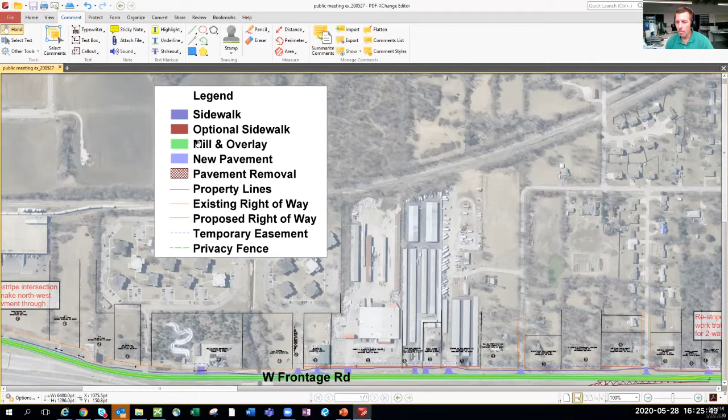So we're calling those optional sidewalk areas. The green is mill and overlay - that's where they come in and scrape off the top couple inches of asphalt and put down a new layer. The lighter blue color is anywhere we have new pavement, so anywhere the roadway follows a new alignment, that's where you'd see the new pavement. The cross-hatched area is where we have pavement removal.

Black are existing property lines. Orange is the existing right-of-way line, on the front edge of the properties as they abut - right now it's MoDOT owned, but that'll change over to city owned after this project. The proposed right-of-way is the red color. Temporary easements are a dashed blue, and there are a couple places where we've indicated privacy fence on the project, and I'll point those out as we go.

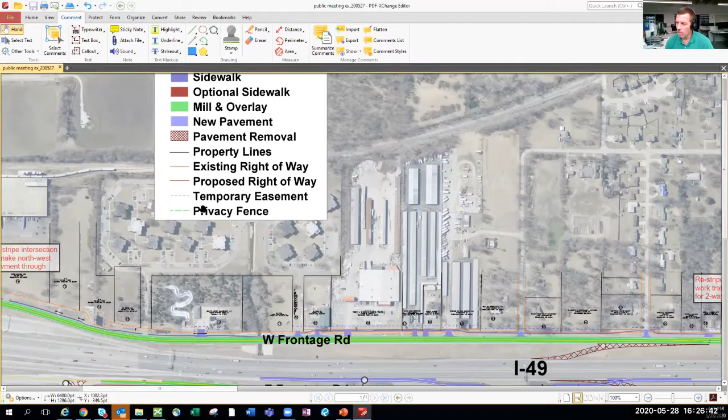So with that, I'm going to start on the south end here on the east side. This is the MO 150 interchange, fairly recent here. Today at this intersection, this is White Avenue on the east side. This is where the frontage roads currently go from two-way to one-way. So there will be some restriping, putting down new pavement markings, getting rid of the medians in this area to allow for that two-way operation on the frontage roads.

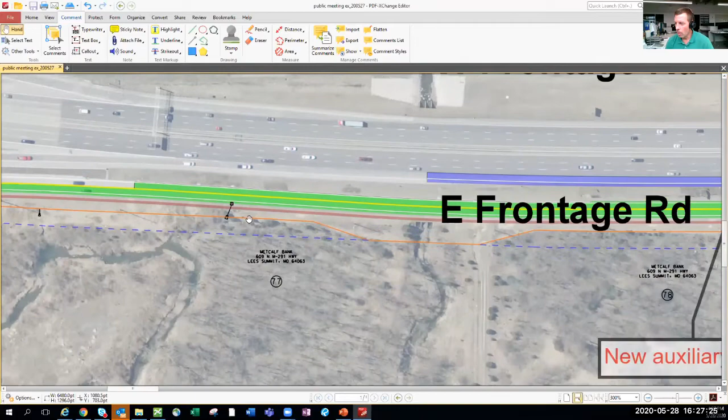And then we go into a mill and overlay section for quite a ways here. You'll also notice the sidewalk - this is one of those areas where we put this as optional sidewalk. This is a large tract with several large culverts. It's steep, it drops off pretty sharply.

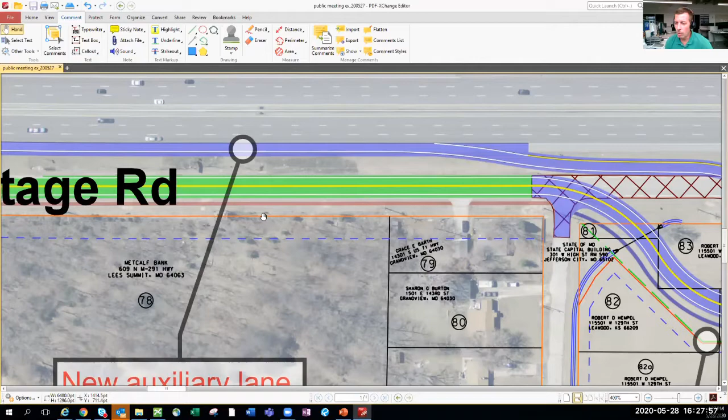But we don't want to settle for less. We want to get as much as we can out of this project, so we're showing it. We're acquiring the temporary easements in order to build it, and hopefully the design build teams can stretch the project budget and get that sidewalk put in.

Here you'll notice as we approach 140th Street, those ramps to and from 140th Street are all coming out, and the movements to get to 140th Street are shifting to roundabouts on either side of I-49. On the east side, the roundabout sits south of 140th Street, and on the west side, it sits north of 140th Street.

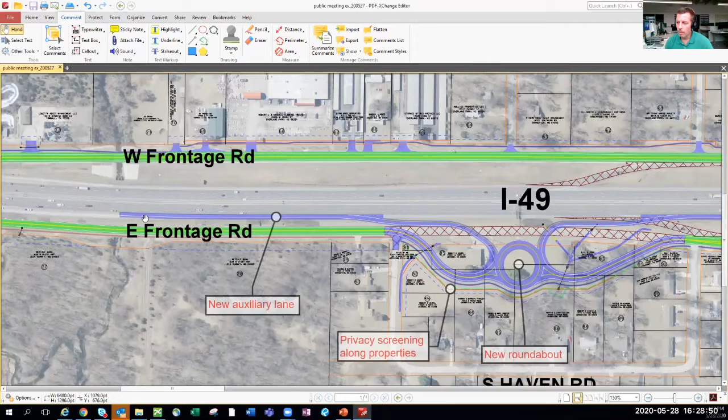So what you're seeing here is adding a new auxiliary lane between the Mo 150 interchange and this new roundabout on the east side to handle that traffic to and from 140th Street.

This is one of those areas where we've identified privacy screening along the properties. These are all residential properties that are getting a brand new roundabout and infrastructure put in their backyards essentially, so we want to provide some screening there for those property owners.

Again, a new roundabout that will serve the northbound traffic on I-49 to and from 140th Street.

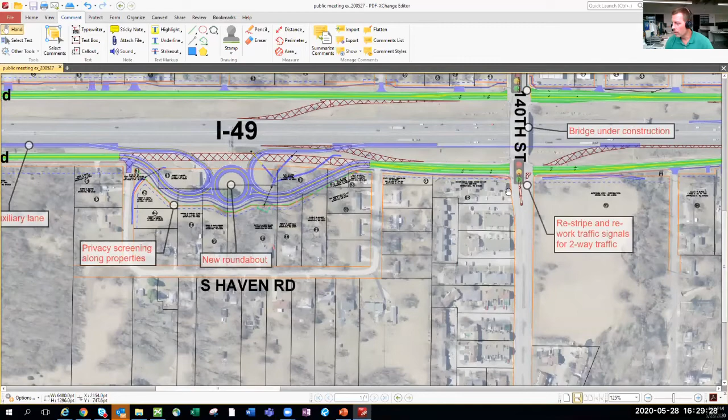Some of you may know, if you're residents in Grandview, that the 140th Street Bridge is currently under construction. This project is not tied to that one; however, there will be some coordination between the projects.

One thing I'll point out here is on the auxiliary lane underneath the bridge, you'll notice a gap of pavement missing. That is actually being included in that other project, so that we don't have to come back and build that with our project and tear up the work they're doing there.

Moving north, 140th Street will get all new striping. The traffic signals at these intersections will have to be reworked to allow for that two-way traffic.

And Scott, I want to jump in one second and just say—yeah, I know some folks in town have wondered about the bridge and why it isn't part of this project, or if it is part of the project.

And it isn't. We talked a lot with MoDOT about being able to maybe keep the jobs together, but it wasn't possible, just due to different funding and timing requirements that our agencies have, the city and MoDOT. So we did try, we weren't able to do it, but in the end we're going to end up with the same type of facilities as if we had. I just wanted folks to know it wasn't something we forgot about or didn't talk about—we were just not able to work out a lot of the details.

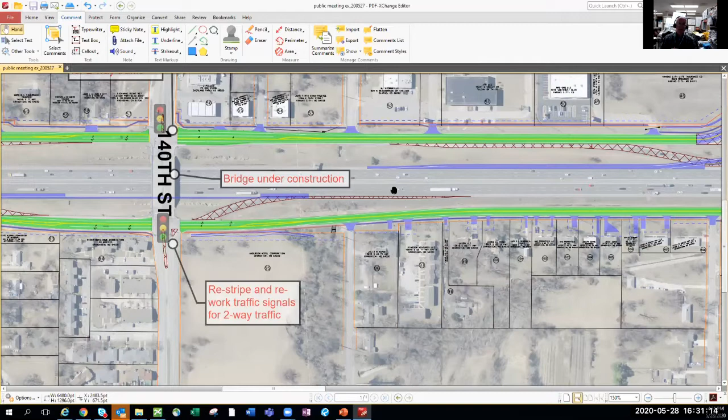Thanks, Scott. Mm-hmm.

So I'm just going to move up the east side here. We get back to the green, which again is just mill and overlay. We are having to replace some of the driveways along here because we're putting in new sidewalk all along here.

So that continues for quite a ways here. 135th Street is the demarcation between the south and the north project. This is how far south MoDOT took the design, and this is where our design for the south part matches in with that.

As we approach Main Street here, you'll notice that the existing ramps to and from Main Street are getting removed, and those are being shifted to be closer to Main Street. Then on the outer road here, this curve is being reworked to allow a smoother transition from the outer road to High Grove.

At that point, the outer road traffic would come down High Grove Road, and we're putting in a new road between High Grove and essentially 129th Street to the north to serve as the outer road traffic from north to south at Main Street.

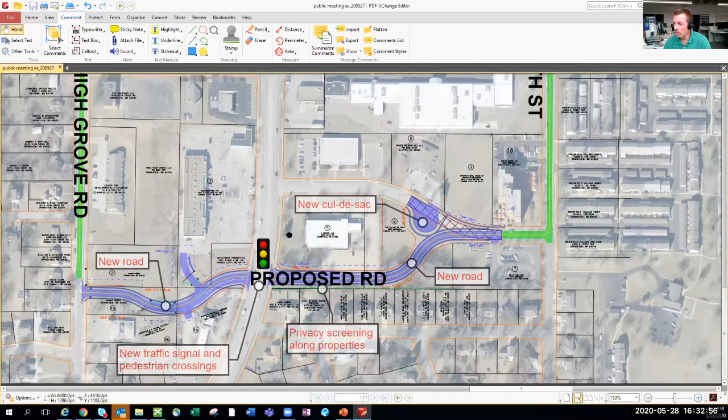This will require a new signal at this intersection and a new place for pedestrians to cross Main Street at that location. We have another area here to point out.

With this being a new road along the backside of these properties that don't currently have a road in their backyard, we are going to put some privacy screening along these properties as well.

This proposed road will tie into the existing Booth Lane here, which will mean that the existing Booth Lane to the south will end up being a cul-de-sac at that point.

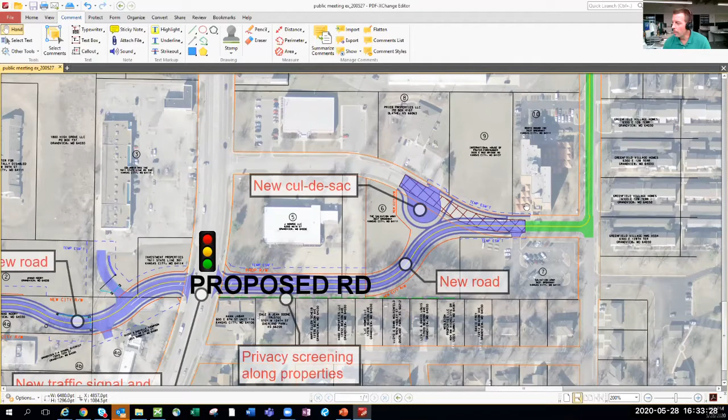We match into the existing Booth Lane and then follow down 129th Street, with a curve to allow for a smoother transition to the outer roads. Back into a mill and overlay section with additional sidewalks all the way up to Harry S. Truman Drive.

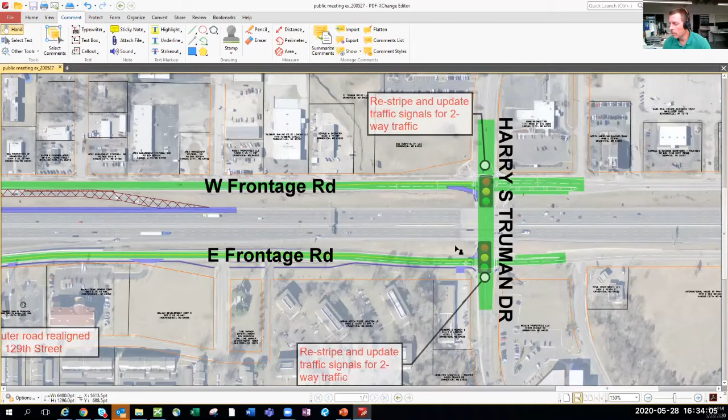At that point, the outer roads go back to one-way operation north of Harry S. Truman Drive. I don't know that there was a plan to do more with this project at this time - basically that's where we ran out of money. One of the things we planned for is some other facility that could carry two-way traffic from Harry Truman Drive up to Blue Ridge.

If you go through Truman Marketplace, you'll see that new 15th Street, the one with the black poles and banners, is someday going to be connected down to Harry Truman Drive, and that would be the path the two-way roads would follow up to Blue Ridge. In the future, possibly the same thing would happen on the east side, depending on what kind of development goes into that area.

So what we wanted to do, especially in the commercial areas, is keep the traffic in closer to commercial areas. That's generally what folks like for visibility and to help people get in and out. So that's what you'll see right now.

We also hope that maybe someday in the future we could eliminate some laneage, especially on the west side frontage roads, because there's a lot of lanes there. For sustainability and resilience, you try to eliminate some of that, or maybe run a trail down there - as you all know, there's no sidewalk along the frontage road there.

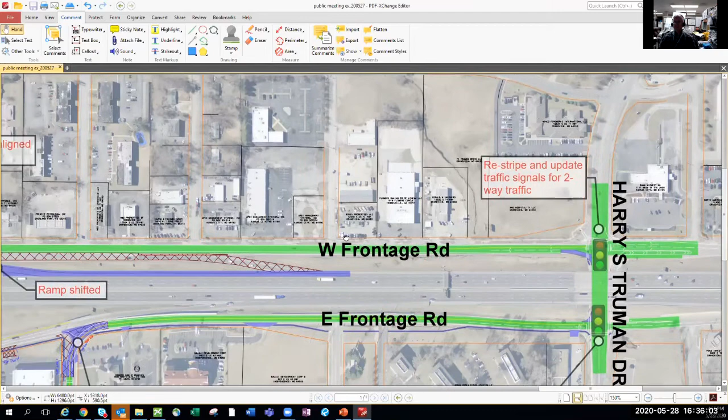Okay, so then turning around at Harry S. Truman and going back down on the west side, again we have an area where the existing ramp is getting removed, and that ramp is being shifted up closer to Main Street.

We have the frontage road transitioning to tie into Goode Avenue here. Again, a little bit of full depth needed for that curve there.

And then at Goode Avenue, and this is 15th Street, traffic would make its way back over and across Main Street. There will be some new pavement needed in that area to add some lanes. There's an existing signal there that will need to get updated.

And then go into a little bit of a mill and overlay down 15th and then back down High Grove, where the frontage road connects back into, or High Grove connects into the frontage road at that point. Another curve needed there.

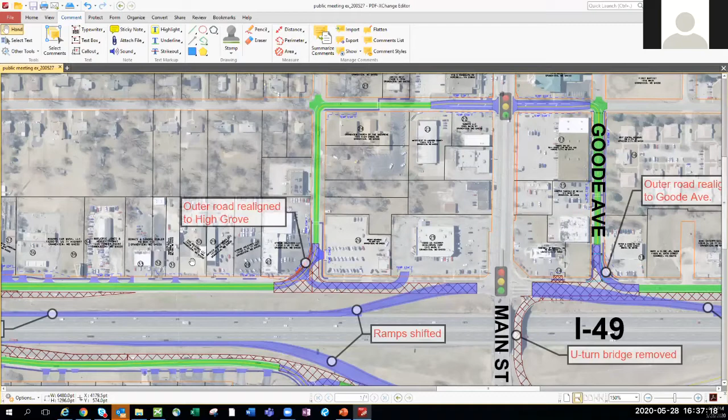And you see this new road isn't necessarily a path that you can go fast on. That's not our purpose. We're going to have our speed limits out along the frontage roads, and our idea is to keep them complete streets that are comfortable for walkers and bikers and everybody to use.

So again, our intent with the two-way transportation isn't for folks to go fast. If you want to go fast, go on the expressway, but to service the community, both our residences and our businesses, and keep speeds reasonable and safe. Thank you, Scott.

So then again, we get back to a mill and overlay section south of High Grove here. This is an area with some pretty densely populated commercial properties. So we'll have curb and buried drainage through here to clean up some of this access along there.

And then we get to the west side roundabout that serves traffic going to and from 140th Street. The added benefit of this roundabout is that there's a connection over to 15th Street, and I believe this is a prime development area for the city, so this is going to be a good investment for the city here.

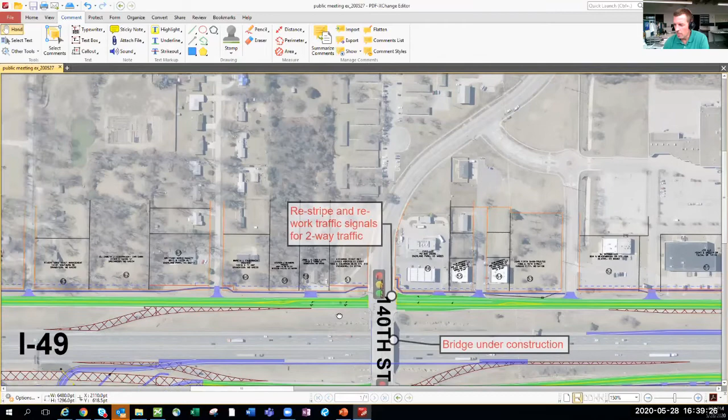The southbound on-ramp again comes out because now traffic is going to backtrack a little bit, come back to the roundabout on the two-way frontage road and loop around to get on I-49. Then from that point on, it's pretty much just going to be a mill and overlay with an adjacent sidewalk all the way down to the 150 intersection.

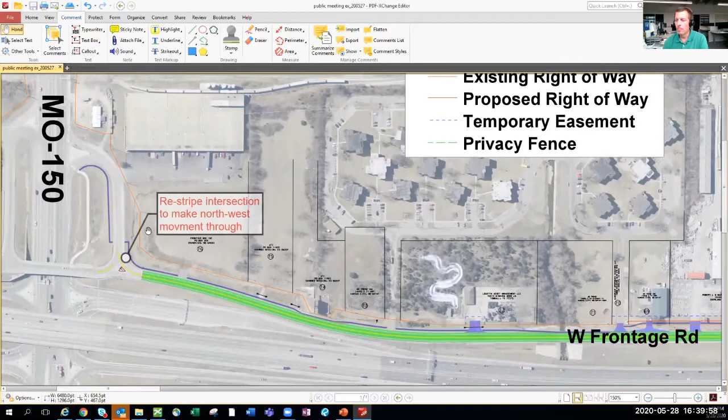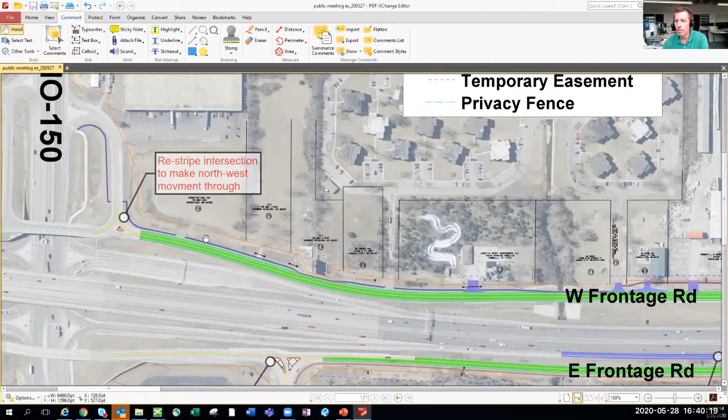From a sidewalk standpoint, we talked about a couple areas that had the option, that was on the east side. The goal for the city is to have a continuous path from MO 150 all the way up to Harry S. Truman with this project, so we will be requiring the sidewalk to be placed on the west side for the entire length of the project to make that connection.

So that is the preliminary design. I'm going to hop back to the presentation here.

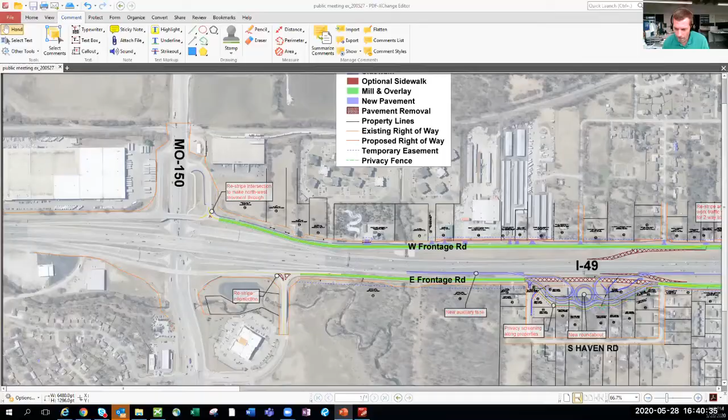So next steps with the project. We've mentioned that public comments will be taken through June 5th. The right-of-way acquisition process for the south half of the project will begin shortly, and that will be explained in a little more detail on the next slide.

We've mentioned this before, but design build team selection, looking at late summer, fall for that. Construction to begin in early next year and end by summer of 2021. And so with that, I will turn it over to Tim Orrick, who is the city's attorney doing the appraisals for the property on the project.

Well, thank you, Scott. This is an unusual way to do a public meeting like this, but it might be the future, and I hope we're able to communicate a general outline of the right-of-way acquisition process, keeping in mind that if you do own property that will actually be directly impacted by an easement, there will be much communication to come in the months ahead. So generally, the right-of-way acquisition process...

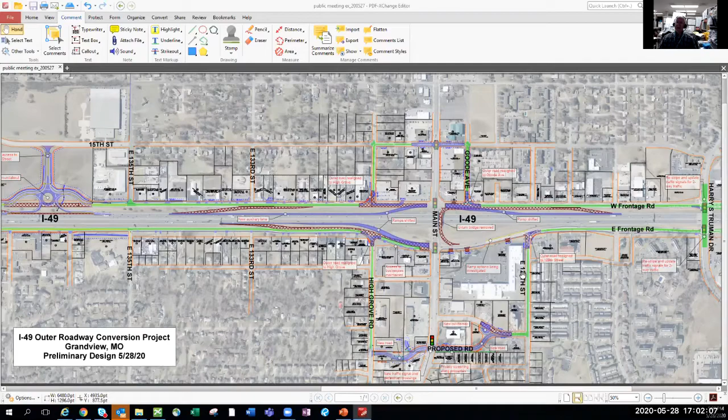Next question: will there be parking on the new 29th Street? That's a good question. I assume we're talking about 129th Street, the area to the north, on the north end.

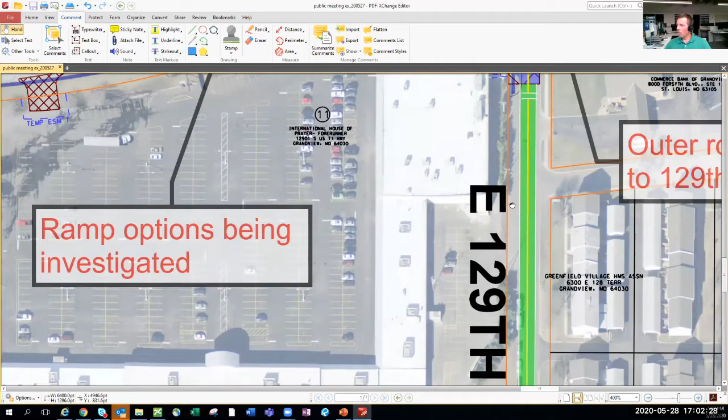The plan there was not to modify what's out there today. I think the shape may be a little off because it doesn't look like it's quite overlaying the full width of the road, but the plan is not to mess with the widths and what's out there today.

So the proviso is this: as always, per every street in the city of Grandview, if there ends up being a problem regarding parking or safety because of that, we have processes. A Citizens Advisory Commission on Transportation looks at it, and ultimately, if something has to be done, it goes to the Board of Aldermen, and they make the final decision after input from citizens. But right at this point, we don't anticipate a change.

Next question: will construction take place on both outer roads simultaneously, or east side first, then west side? This is another one of those areas where design build is a great delivery method. We're trying to leave it as flexible as possible so that design build teams can come in and look at innovative approaches to building the project and keeping things open.

There will be certain movements that can't be closed at the same time. Those sorts of things will be in the contract, but as far as the phasing goes, that'll be up to the design build teams to determine.

And that's not as scary as you may think. Design build teams know one thing: the quicker they can get a job done, the better it is for them—I'll use the P word, it's more profitable for them. It makes everybody happier, so their objective isn't to create times when roads are closed excessively.

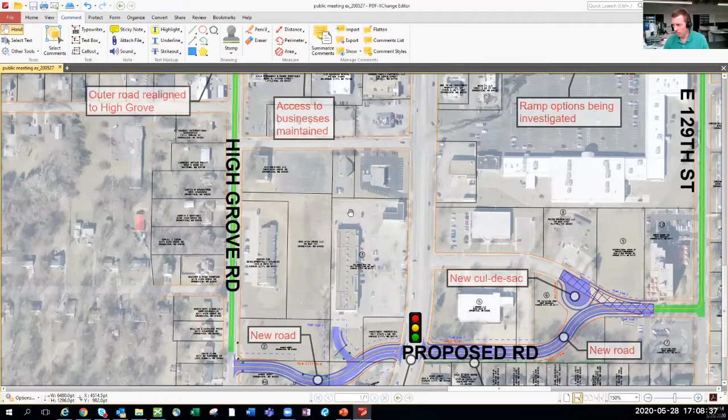Next question: do we have any indication of the amount of traffic increase flowing through High Grove, New Road, and 129th on the east? Dennis, on that one, I would say yes. Again, this is the area that MoDOT designed. As part of the access justification report, they did an overall model of the traffic for the entire project, which showed what traffic was diverting down to High Grove and up to 129th Street. I don't know the exact numbers, but the proposed lane widths and configurations shown today were adequate for the traffic increase at that location.

For reference, right now you may say, look at all the traffic on the frontage road, but especially as we get up to High Grove, between High Grove and 129th Street, a lot of the traffic you see is either getting off the expressway or getting on the expressway. That traffic won't be going down High Grove or 129th Street, just a portion of it. So what that exactly will turn out to be, I'm not sure, but again we've modeled it — we're putting in two lanes, and that's more than adequate to handle it. So I think it's not going to be bumper to bumper traffic going through there by any means. It'll be the portion that stays on the frontage road.

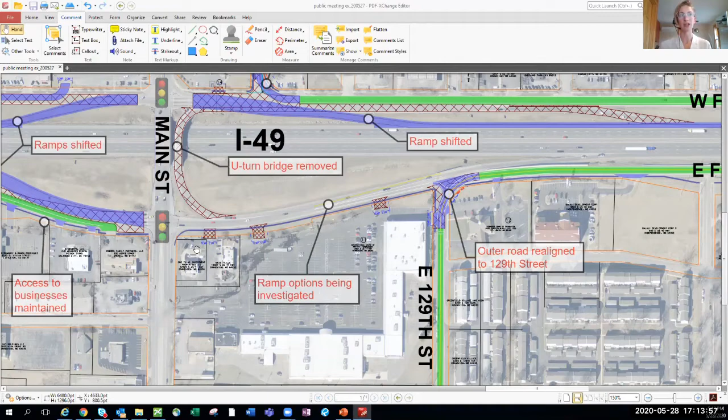And here's another question: there probably shouldn't be parking on that road, it being an access road. Would have been the one you were just talking about - on 129th Street. Yeah, and that may well be.

Like I said, the city has a process for parking restrictions. We just went through one for another street in town. So that's something, again, I think we want to make sure everything's safe, but we want to make sure everybody has an opportunity for input. This is one of those cases we can build a road that if everybody ends up, including the police and the advisory committee and the board, feeling it would be best to restrict things, that's fine - I put up the signs. So again, it leaves flexibility, and it's not that we don't think it's right or wrong, it's just something we can deal with a little further down in time and make sure everybody's comfortable. The road will handle it either way, so there isn't a loss or anything like that. I hope that helps a little bit.

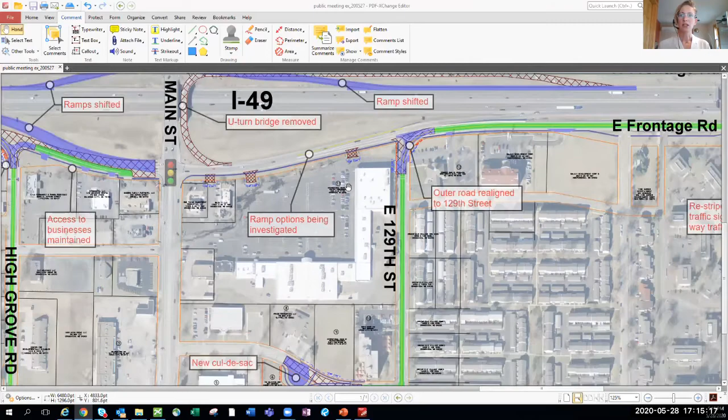Yeah, and one more question we've received here: it appears that there's no convenient on and off to I-49 south of 140th Street. With that being the case, is there another on and off route? 150 Highway westbound to southbound I-49 is a horribly slow connection route. So, I can repeat if you need.

Actually, Scott could jump in, but if you get off at the big roundabout and go south on the West Frontage Road and then cross 140th Street and turn right, you're right there. Yeah, so that's how we had planned for you to be able to get there - not to go down 150. I understand your comment exactly, but our plan for getting to the East Frontage Road south of 140th is to get off at the big roundabout and just go that way.

Exactly. So in the northbound direction, you would exit here, go through the roundabout, and then up to 140th Street, and then from 140th Street to I-49 northbound it would just be a little bit of a backtrack down the frontage road, through the roundabout, and back around to I-49 northbound. So you should be able to do it. That's why the improved 140th Street Bridge is important, because there is going to be a reorientation of the traffic. Again, it's different, but our intent is to make sure we've got access to all the properties without going through intersections like 150 and I-49.

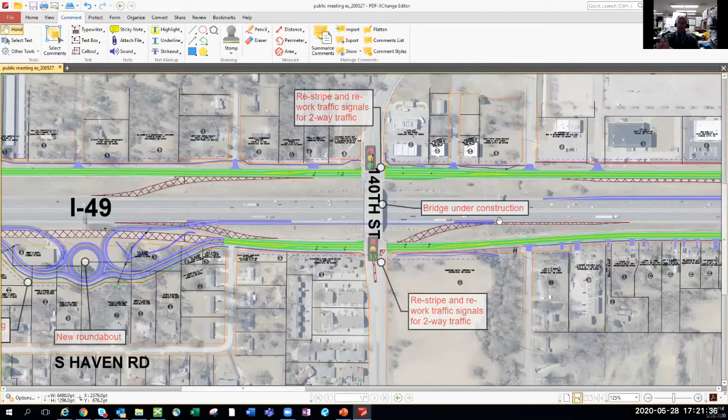I also want to mention the slip ramp on the north side of 140th. It's quite a grade down to the expressway, and there's always a conflict between people coming up the frontage road and people turning right on 140th Street about who gets the right of way. I see it every morning. This really makes it more effortless for drivers in terms of who gets to go first and who's going down where, and that's been one of our objectives.

It also gives a longer merge down onto the expressway, which is an objective of the Federal Highway Administration and MoDOT. The more time you have to run along the expressway in that auxiliary lane, the better chance you have to merge into traffic safely. A lot of safety aspects on this job will make the whole system nicer to drive on.

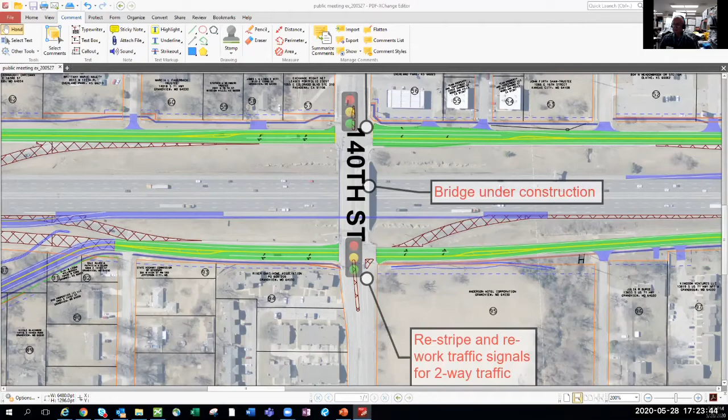I guess the second part of that, there will be access from 140th. It just won't be at the location it is today. You would need to, if you're coming from the west, make a left onto the frontage road, go up to the roundabout, and make that U-turn to get onto I-49 South.

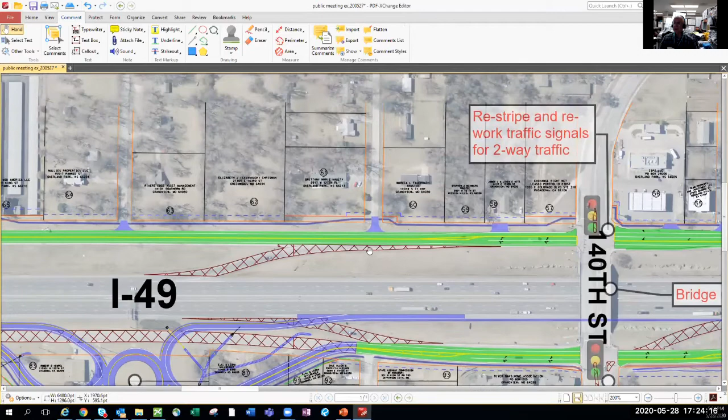There's another alternative too, Scott. If you go back to the west a little bit and run up 15th Street, if you're coming west on 140th, you'll be able to turn left and go to the next street up, come in on the new road right into the roundabout. That'll bypass the signal, you could head south, and probably in the end it'll be a quicker trip for you.

Okay, 140th Street east of I-49 has been a major connection to Byars. With this change, the path will be slowed down.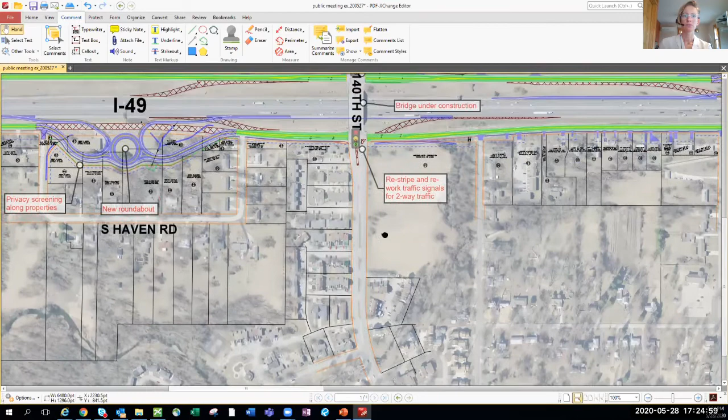Again, I'm not sure that that is the case, because you'll be able to certainly continue across, it will be the same as it has been, and both ramps allow you to get onto 140th. I certainly would be glad to talk with anyone about that and hear what they have to say if we need to make some adjustments. But I guess that would be something we can talk about. We'd be glad to talk with you.

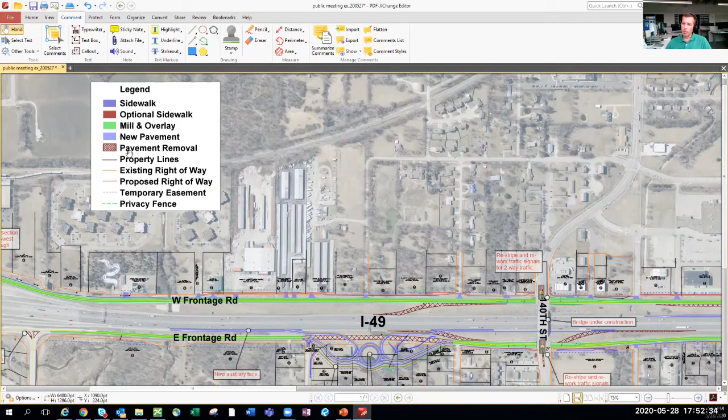Anywhere we're removing existing pavement is shown as a cross-hatched dark red color. The existing property lines are black. The existing right-of-way line, where the property lines touch the frontage road areas, is orange. Anywhere we need to acquire new right-of-way is red for proposed right-of-way, and anywhere we have to acquire temporary easements to do the work is a dashed blue line.

We also have a couple places where we're requiring a privacy screen or fence to be put up, in areas where the improvements run through some backyards of properties.

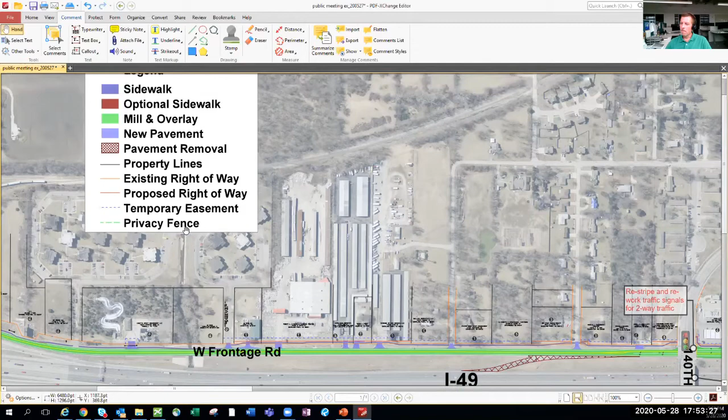So with that, I'll zoom out here and give a big picture view of the south half of the project. From MO-150 up to 140th Street, and even beyond, the access to and from 140th Street is being modified by adding roundabouts on both sides of I-49. Southbound traffic would use the roundabout on the west side, and northbound traffic would use the roundabout on the east side. That's the big picture on the south end.

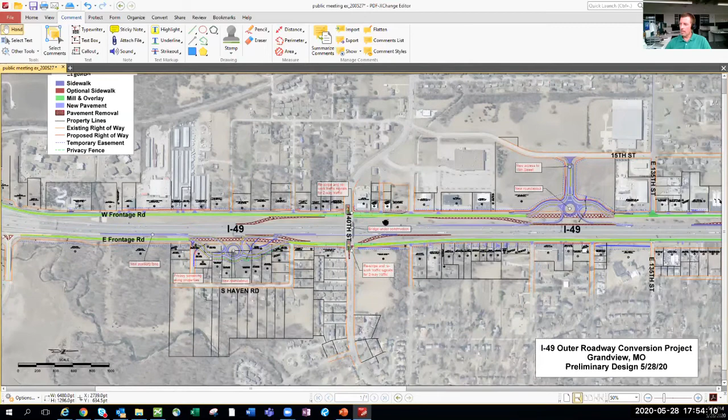On the north end of the project, the access to Main is also changing. For the most part, the slip ramps are moved a little further from the intersection of Main Street, and the new ramps are placed closer to Main Street, with frontage road traffic now diverted down some side streets, even to some new roads adjacent to I-49.

I'll go back and zoom in. What I'm going to do is start on the east side and work our way north, pointing out a few details, and then turn around and come back down the west side.

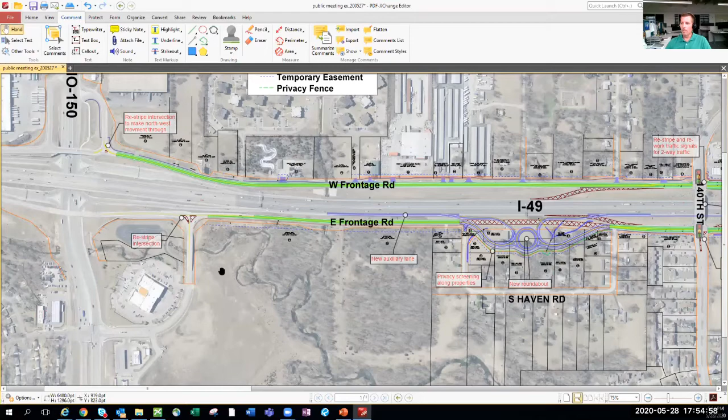Right now, at the MO-150 interchange, at the intersection with White Avenue, is currently where the frontage road traffic goes from two-way to one-way. So there will need to be some modification to that intersection to allow two-way traffic north of it. Then we're into that mill and overlay area.

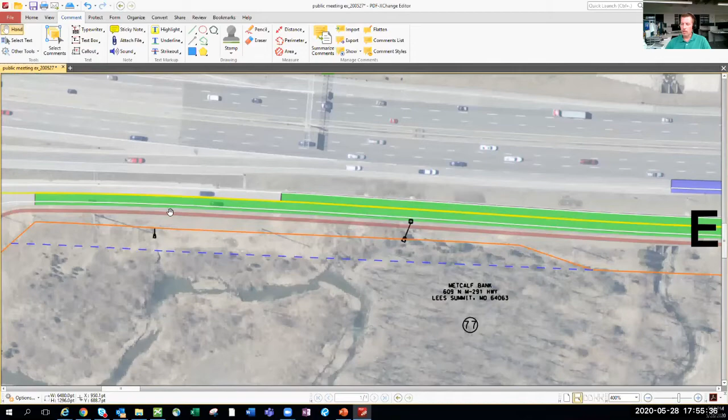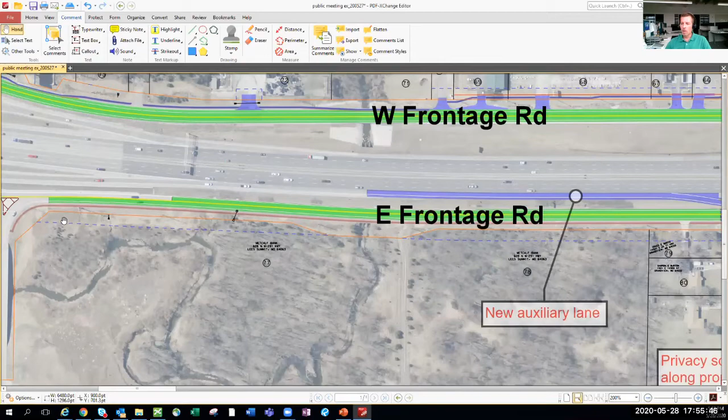We've also got a sidewalk shown here. You'll notice that's the darker red color, which means this is an area of optional sidewalk, so it would not have to be placed along here. It would be beneficial if it was, and we are planning to acquire the temporary easement needed to put that sidewalk in.

Going up to the north, you'll see some new pavement out on I-49. That's becoming a new auxiliary lane for traffic both getting on and off the highway. Getting off the highway, this is the new access to 140th Street. Traffic would exit at that location, come up, go through a roundabout, and onto the frontage road up to 140th Street.

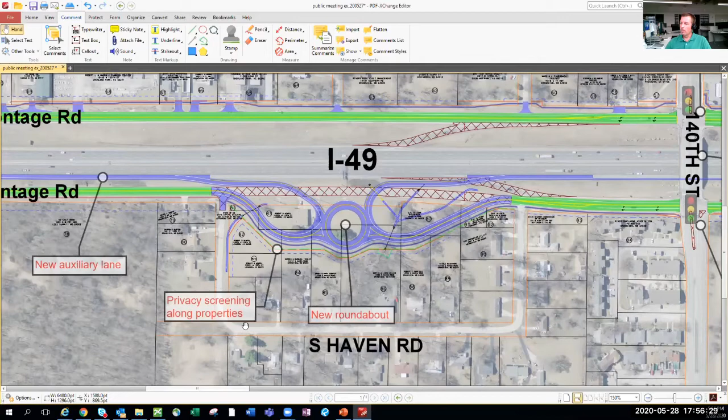This is one of those areas where we're showing a need for privacy screening along these properties. There's quite a bit of area needed to build this roundabout, and these are some people's backyards, so we want to put up privacy screening along the backside of this roundabout.

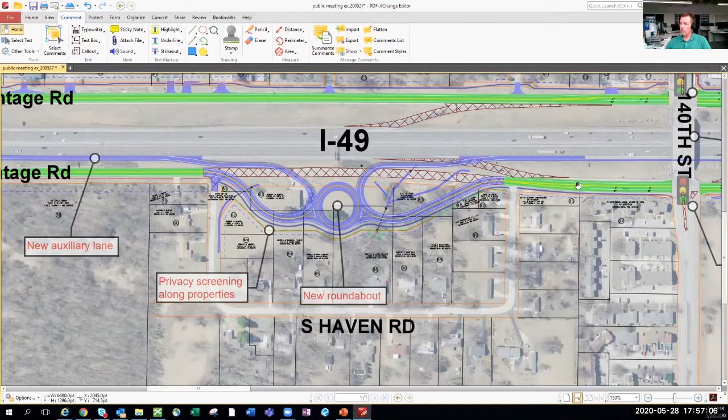This also becomes the way that 140th Street traffic now accesses I-49 northbound. So if you're on 140th Street from either direction, you would turn onto the frontage road here on the east side, come down, circle around the roundabout, and get onto I-49 north at that location.

At 140th Street, again, all the frontage roads are becoming two-way, which will require redoing some of the pavement marking on 140th Street and all its approaches, and will also require reworking the traffic signals at that location.

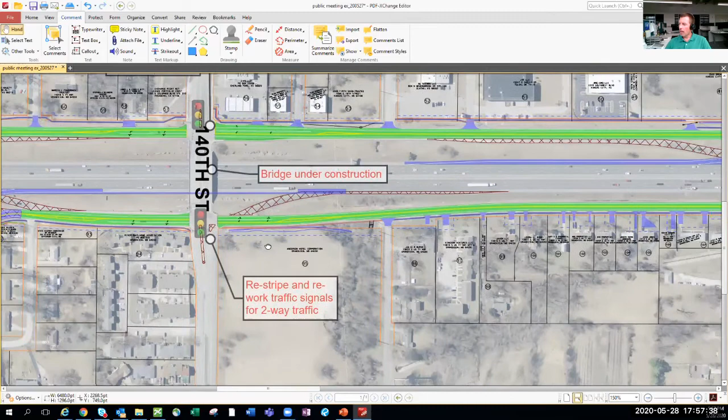Moving to the north, again, we're in that green area, so that's the mill and overlay section. We will be having to redo some of the driveways through here, mainly because we're adding the sidewalk along there, which pushes the grading out a little ways and requires us to replace some of those driveways.

That mill and overlay continues all the way up to the north, really all the way up to almost High Grove Road.

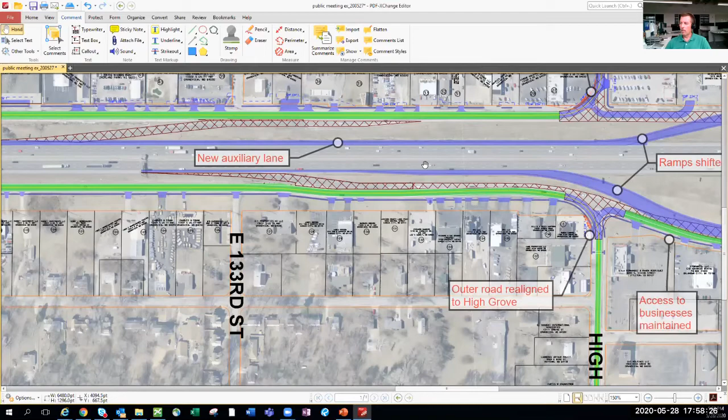At that point, this is where we've separated the I-49 traffic from the frontage roads. So I-49 northbound to Main Street now has a dedicated ramp, a new ramp at that location. The outer road traffic will be on the outer road, and we've got a new curve at that location to create a smoother transition from the existing outer road to High Grove Road, going down to the east.

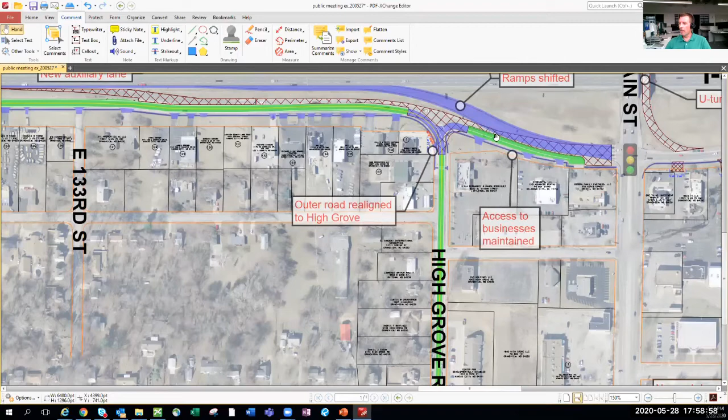Access to these businesses here will be maintained by a short access road to the north. Frontage road traffic will come down High Grove Road now to a new road that runs north and south at this location. That will require a new traffic signal be put in at that intersection, which will also allow for pedestrian crossings across Main Street north and south.

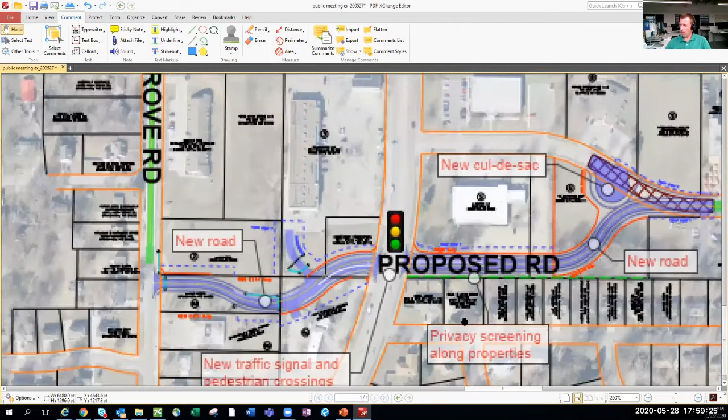As the road crosses Main Street to the north, we've got another place where we've indicated some privacy screening along these properties where they've got a new road in their backyard, essentially. That new road then curves over and ties into existing Booth Lane there to the north, which means that Booth Lane to the south will be turned into a cul-de-sac at that location.

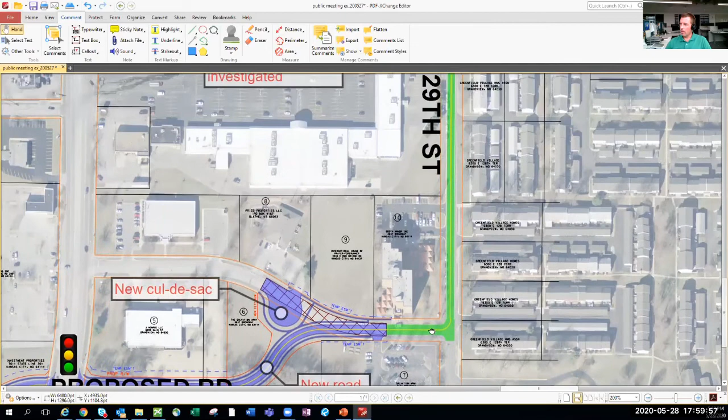Then continuing down 129th Street, this is all back to the mill and overlay section until we get over to the transition to the frontage road. Again, at this point, realigning to create a smoother transition between 129th and the frontage road, so need to do a little bit of pavement replacement in that area.

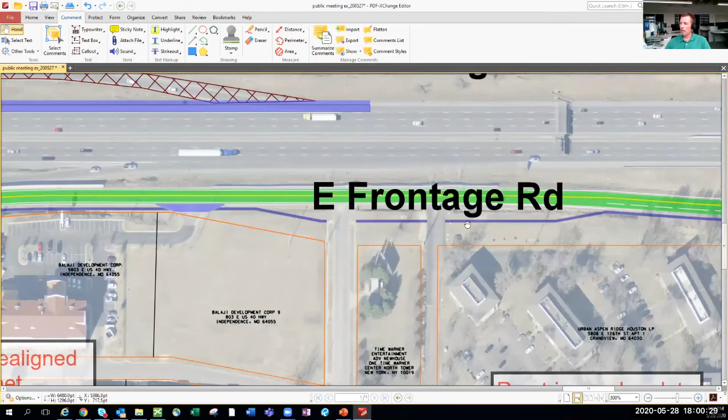And then from that point all the way up to Harry S. Truman Drive, it's again a mill and overlay, a restriping, but adding new sidewalk along that area as well. At Harry S. Truman Drive, continuing to the north of there, that is currently one way and will remain one way. That is not included in this project as far as changing to the two-way operation.

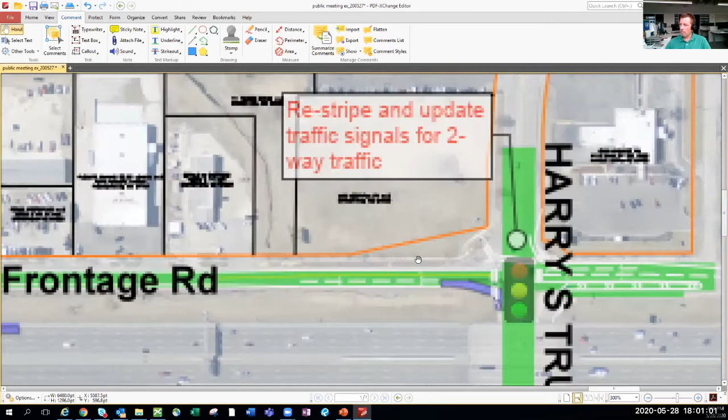So this would be the intersection that goes from one-way to two-way on both sides. I'll hop over to the west side. You will notice in this area we don't have sidewalk shown. There is an existing sidewalk out there that is in good shape, so that can stay and will stay along there all the way up to Main Street.

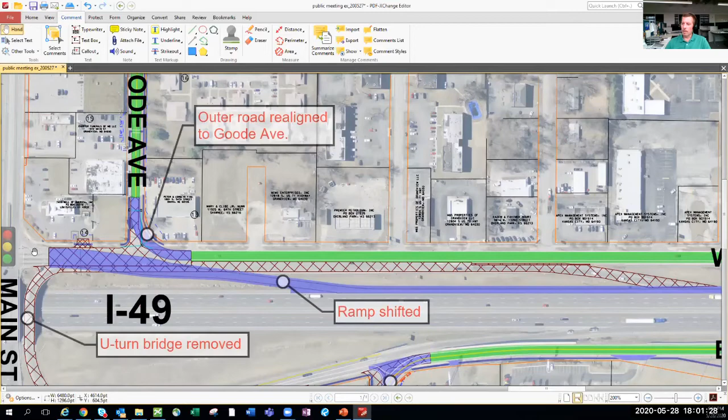We are here in this location. The ramp gets shifted. The existing ramp is further to the north, and that'll get shifted down closer to the Main Street intersection. With the two-way operation, this U-turn bridge becomes obsolete and will be removed with the project.

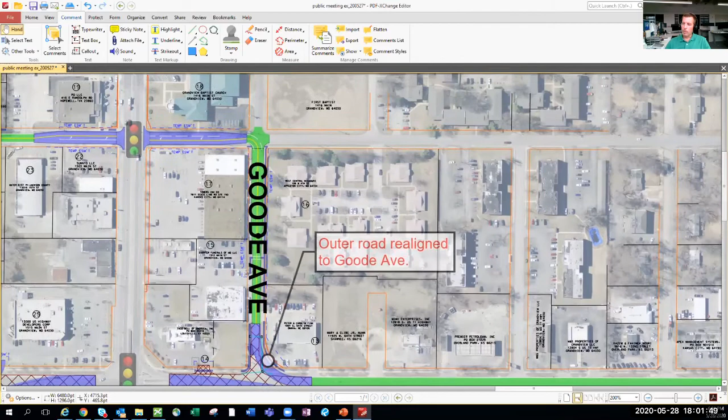And then the outer road will now get redirected down to Goode Avenue here, over to 15th Street, where a little bit of extra pavement is needed on the approaches to 15th Street to cross the Main to add additional lanes. Gets transitioned back to mill and overlay as it ties back in with High Grove Road.

High Grove Road comes over, and again, we need a little bit of new pavement to make that turn to connect into the existing frontage road. We're back to mill and overlay at that point.

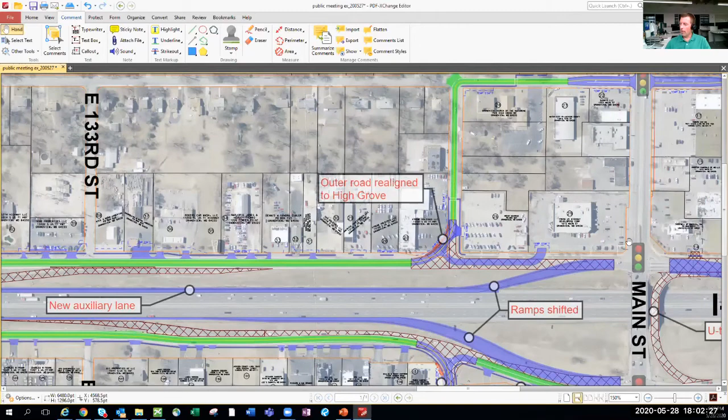You will notice from Main to southbound I-49, there's a new ramp at that location, which also includes a new auxiliary lane. So this is a full lane from Main all the way down to the new roundabout here on the west side.

So yeah, southbound traffic trying to go to or from 140th Street will now use the roundabout here on the west side. The added benefit to this location is that we've now added access over to 15th Street here to the west, which creates some economic development opportunities in that area.

Traffic will again use this roundabout for any southbound traffic to or from 140th Street. Pretty much the same continues down to 140th Street and beyond with mill and overlay, adding sidewalks to the outside, restriping for the two-way traffic.

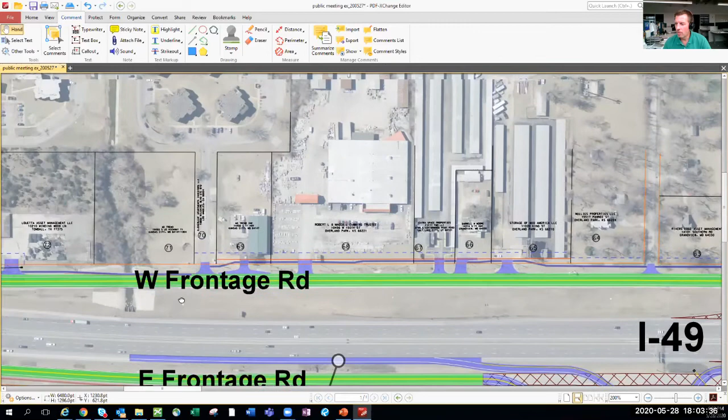That continues all the way down until it ties back into the 150 intersection here. There will be a need, again, this is the area where traffic on the frontage road goes from two-way to one-way. So there's going to be a reconfiguration of the intersection at that location, restriping that to make the north and west legs the through movement, and the south leg will tee into that at that location.

So that's an overview of the preliminary design.

Okay, so next steps - we've covered some of these already, but public comments after this point will be accepted through June 5th.

We will talk about the right-of-way acquisition process. That will start shortly for the south half of the project. As I said, it's already underway for the north half of the project. Design build team selection is expected in the fall of this year, with construction beginning early 2021 and ending in the summer of 2022.

With that, I'm going to let Tim Orrick, who is the city's attorney, acting as the acquisition agent for the property acquisition on the property, talk a little bit about the process there.

Well, great. Thank you, Scott. Again, I'd like to say good evening to everyone, and appreciate you taking the time to tune in and learn a little bit more about this project.

As Scott indicated, my assignment or area of responsibility for the project is to act as the city's right-of-way agent to acquire new easements and other property rights that might be necessary for a project like this.

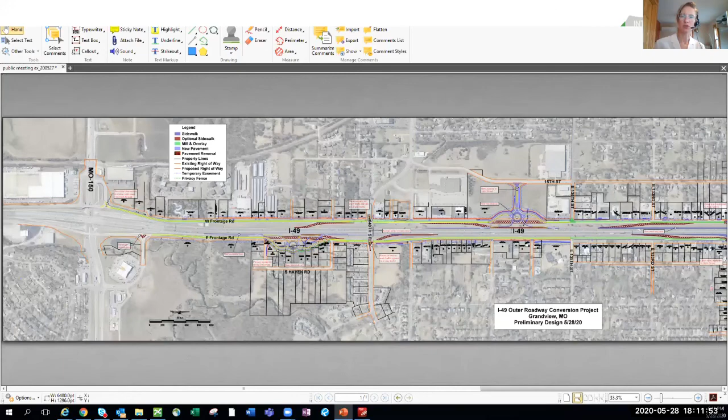So the entrance to Taco Bell on the east side is getting removed. We're currently in negotiations with them to add an entrance from the frontage road on the north side. Their access point along Main Street will remain.

The question about Walgreens - Lisa, I don't see this question on my end, can you reread that part? It's in the Q&A box if you want to see it. But I believe the question is, is the only entrance and exit to Taco Bell and Walgreens going to be Main Street? That's what was intended there.

Yeah, and the answer is no. There'll be another entrance to Taco Bell, we're working on that. For Walgreens, there'll be the Main Street entrance. And then, Scott, you can point out there's a new configuration - you can go down High Grove and turn on the two-way frontage road and get back to Walgreens. Why is it like that?

We're having to work this transition with the Federal Highway Administration and the Missouri Department of Transportation. Their interest is in their on and off ramps, and they believe strongly in not having driveways on their ramp areas. We're having to figure out how to service our businesses considering that desire by those agencies not to have access. So this is what you see.

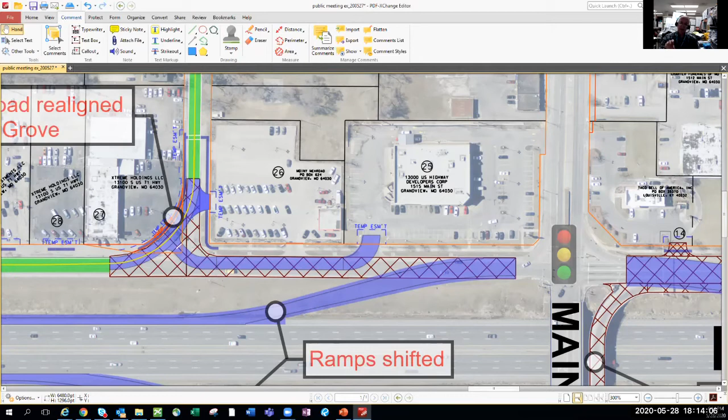I think I wanted to mention one of the problems Grandview has had. Back in 1980, when they first imposed these one-way service roads, and since then as they've turned US 71 into Interstate 49, it was the Highway Department and the Federal Highway Administration imposing an expressway on a city. The expressway was built to serve the expressway, not our residents or our businesses.

What we're trying to do with this project is put the city first. But in doing that, we have to respect what the Federal Highway Administration and the Missouri Department of Transportation feel is important for the safety of their expressway. Our interest is in making access to our businesses and residents, and making travel around the city on our local roads safer and smoother.

But again, what it means is we have to do some adjustments with driveways. We're doing our best to make sure those changes aren't disruptive, and we continue right now to do modeling and negotiate with the Highway Department and FHWA on ways to least negatively impact our businesses and residences. So we're looking at a complete change in how an expressway interfaces with the city. Once we do some preliminaries, the design builders will come in and work things out to help enhance the framework we've set up, and hopefully make it even better. It's an ongoing process.

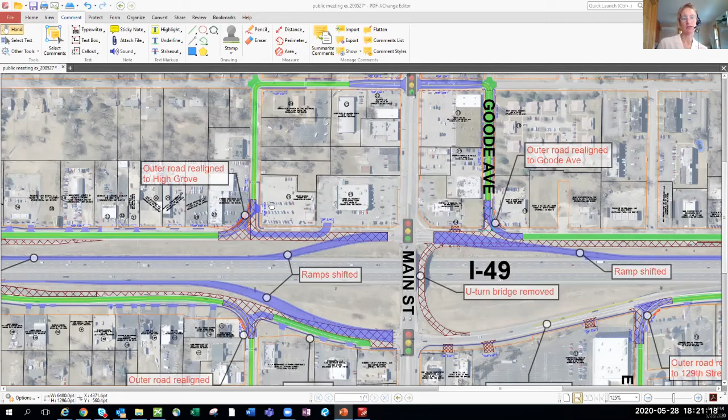To cover the first point, that the side roads wouldn't be able to handle the traffic - this was mentioned earlier tonight in our first presentation, but the traffic flow is changing because we're taking the ramp traffic and separating it from the frontage road traffic. So most of the traffic that's just trying to get off and on Main Street will not be forced down High Grove Road and to 129th Street - that becomes local traffic at that point. There was a traffic model done with the overall project early on that incorporated future traffic projections, and it showed that the existing lanes and configurations here are adequate to handle that future traffic.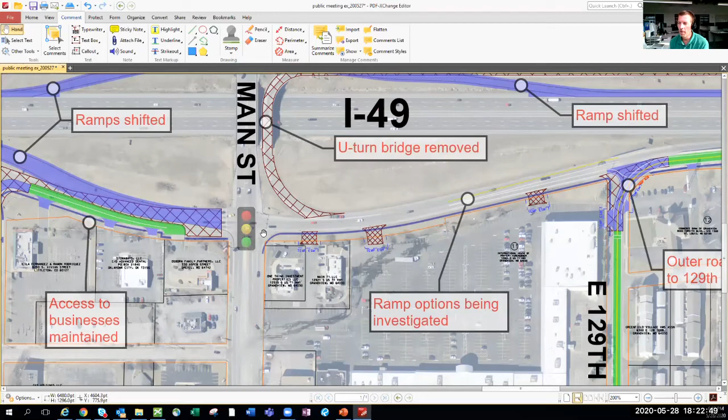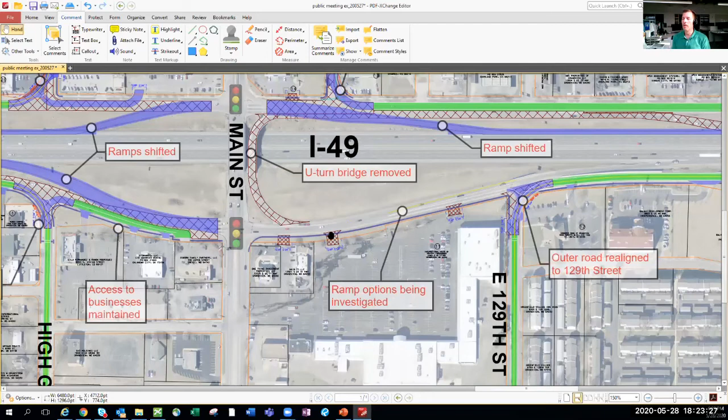Second part of that question was, how do I get northbound I-49 from Main Street going east? If you're on Main Street going east, this area is purposely not shown on this exhibit because this ramp is an area the city is currently working with MoDOT and FHWA on some options. The original access justification report showed the ramp similar to the other three, separated from the frontage road and coming directly onto I-49. The next design iteration left the ramp alone but cut off access to the frontage road at the end. Our current exhibit maintains the northbound access over to the frontage road at that location, and we're looking at yet another option, doing additional modeling in this area to see what could work. But yes, from Main Street to northbound, it's going to be some combination, occurring basically at this same intersection where it goes today.

I think that's the short answer - going onto the expressway, either north or south from Main Street, you're going to turn into the same roadway opening and continue like you have for many years. That won't change. What we're trying to do is move the local traffic, the slow moving traffic, away from that interchange. If you look at the crash numbers, which I recently looked at again, the safety problem on Main Street and at the I-49 ramps is at those two signalized intersections with people turning to get onto the expressway.

We're going to be able to keep local traffic going around the city, going to school, going up to Truman Marketplace, and separate it from that traffic that's a little more problematic regarding safety. We hope to make everything safer - that's a real objective of the job. But if you want to go on the expressway, it'll look the same to you. Getting off will look a lot the same too. You'll come up off the expressway to Main Street and turn like you always have.

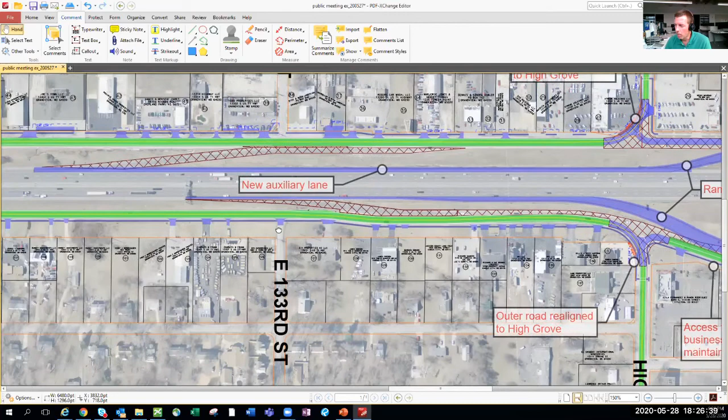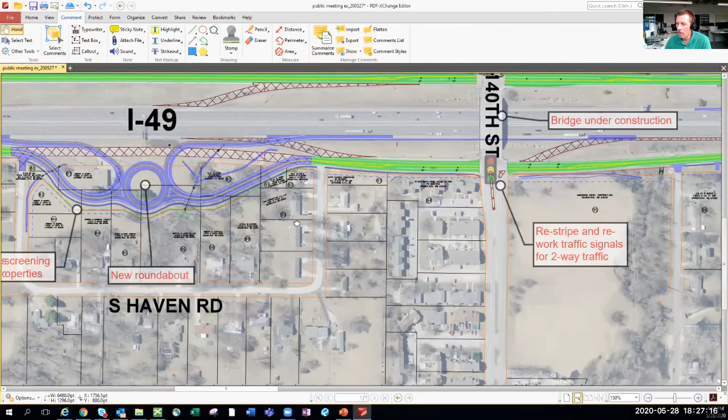The next part of the question is to verify there will be a sidewalk. This is an area where there were several places along the east side that putting a sidewalk in would be very difficult. One of those areas was just north of 140th Street - there's a small section where it drops off very steeply, with a large culvert out there that would need to be extended in order to put a sidewalk in that stretch. This is a property that is probably going to develop in the future, and I'm sure a sidewalk would be investigated at that time, if not included in this project.

The other area along the east side is pretty much from White Avenue all the way up to where the roundabout starts, where the blue goes into the roundabout. That's another area that would be very difficult to get a sidewalk to work in without some major regrading. So those are the two optional areas - everywhere else at this point is being shown as adding sidewalk.

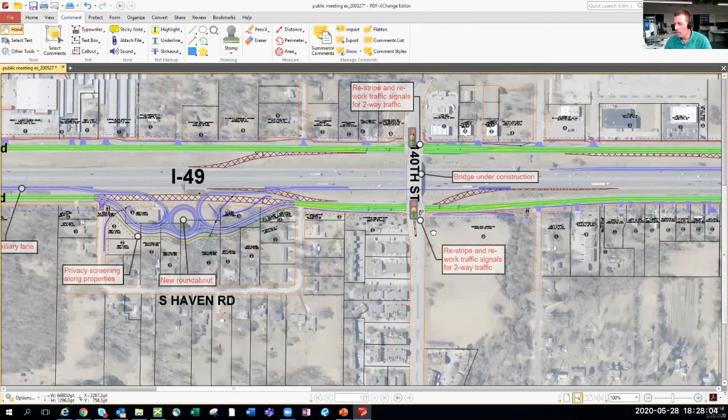As for what will happen to the water drainage ditch on the east side of the outer road - there are several different situations going on with the drainage ditch. In some cases the existing ditch is up close to the road. In other cases, for example at the Lutheran church, there's a really big, windy, deep ditch that goes down through there.

These are areas where we hope to see improvements from the design build teams. We are planning to acquire the temporary construction easements needed to clean up those areas. They may or may not be required to be updated with the project, depending on their location and the extent of the improvements needed.

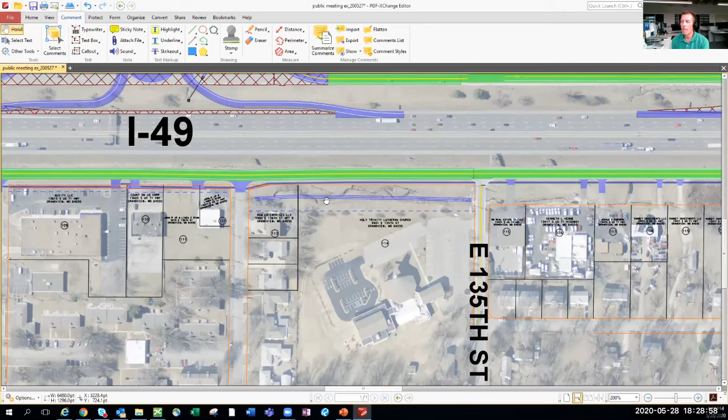You might want to talk about the area by the Holiday Inn, Scott - I think people might be interested in that. Holiday Inn up to the north, right? Yes, up here, north of 129th. Oh, remind me, this one here, right? Yeah, Dennis, right. Okay, yeah.

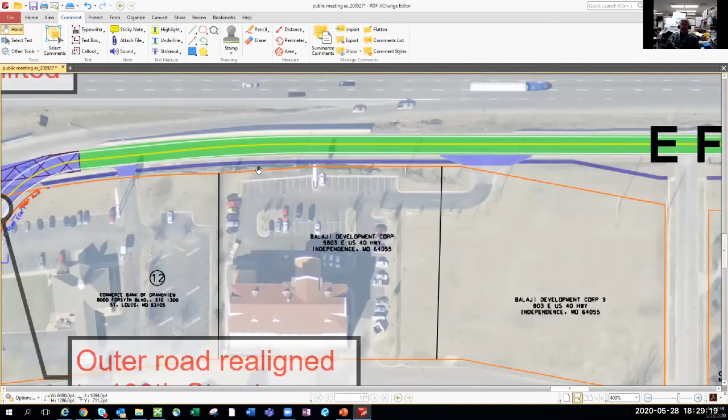There is a ditch in there that we're showing a sidewalk essentially sitting on top of. So at that location you're likely to see some buried drainage through there to carry that water along that property.

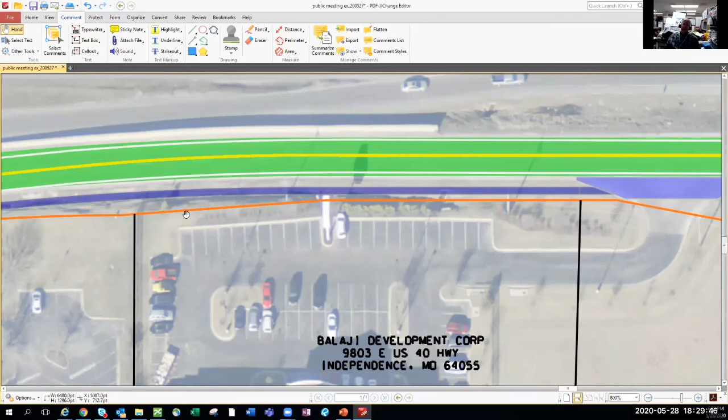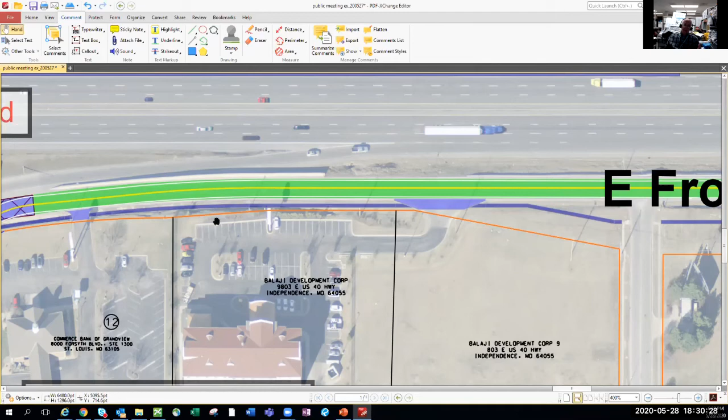As much as possible, working as far as the city is concerned, and also what we hope the design builders will show us, is cleaning up some spots that don't look very good, that don't work very well. Part of our objective, both for folks who just want to walk up and down the street and for people who want to build commercial businesses or retail, is to make Grandview look good. So we'll be putting in curbs and where we can, putting in drainage. For example, at the church further down the street, that meandering drain doesn't work very good - it's always weedy.

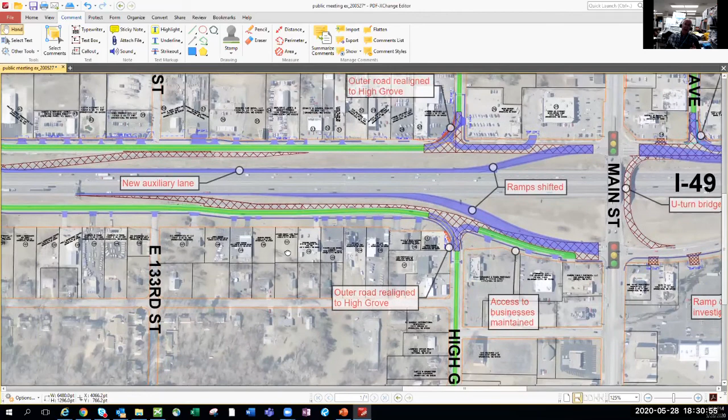It may not be straight. We're going to leave that for the design builders to be creative. There are a lot of new stormwater techniques that can be used, potentially rain gardens or just making a proper meandering stream. It looks good, is natural, is sustainable and resilient. So that's the beauty of design build. We have practical people who build things for their livelihood, working with good engineers who are creative, and they can get together and come up with some nifty ideas and solutions. So that's why we want to do it this way.

It doesn't give you all the answers you may want to grab onto at this point, but in the end, it isn't creativity for creativity's sake, but to make a better job. And for us, that's for the Grandview residents and our businesses, so that we have a job that suits them rather than a job that suits an expressway.

Okay, we got one more question. When is the Blue Ridge Boulevard Bridge replacement scheduled for?

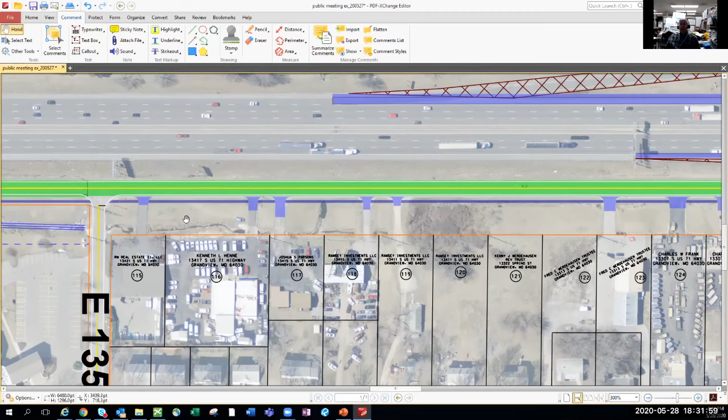Sure, good question, because that's another project we're working on right now. I'll give you a 2-second history. This project is $12 million. The Blue Ridge Bridge will be about $7.1 million. 75% of the money for that bridge we've gotten from the federal government, the Federal Railroad Administration, and from the Kansas City Southern Railroad, which is great. We're going to be paying 25% of the cost.

We are in final design stage right now. We're making adjustments required by the Kansas City Southern Railroad. And we tentatively have a bid planned for early next year.

It depends on - again, COVID is affecting all our projects right at this point. I'm hoping right now that we'll have that bid sometime between late January and say June, with a start later in the summer. So that'd be the summer of next year. It takes about 2 years to build a railroad bridge, and so we would finish that bridge hopefully in 2023.

We'll have altogether, between that and the I-49 frontage road jobs, about $20 million of projects going out. One of the biggest programs the city's had. But anyway, that's where we see the project right now.